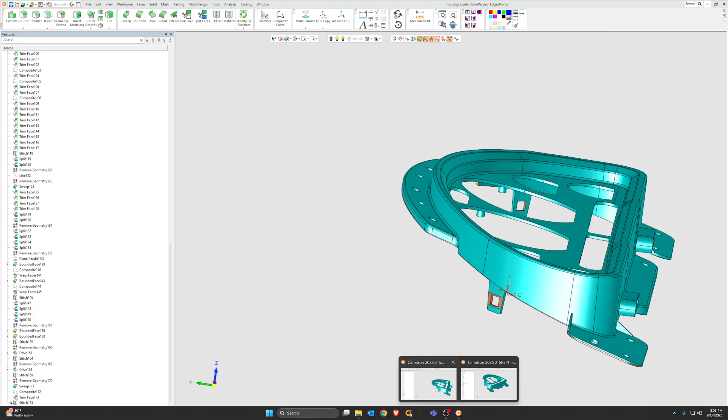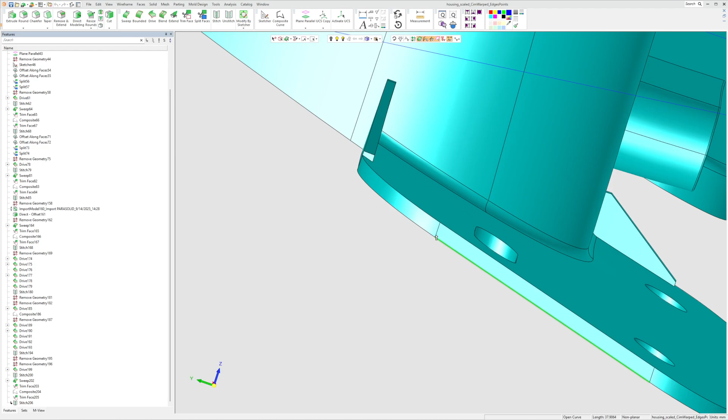Picking up where we left off, we had finished correcting our extra pull directions, and I was talking about how these NURBS faces will create wonky parting lines. What you can do to avoid that is cheat it a little bit. You can just move the parting line up a little bit, and we're talking 0.05 millimeters. So what do I mean by that?

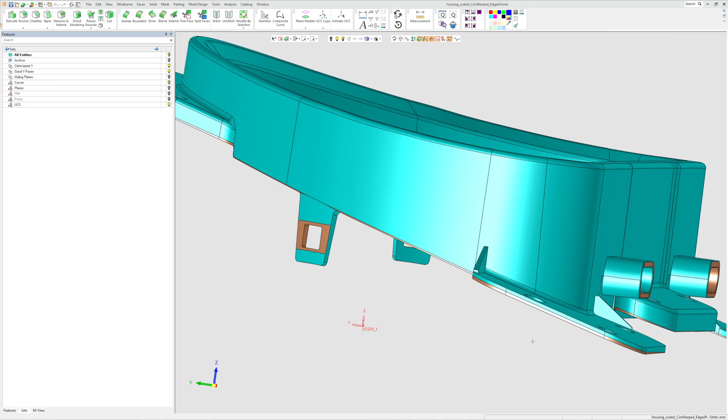Let me turn on all of these, as you can see here. This is quite large just because of the way this part is angled, but also just to demonstrate what I'm doing here. I've essentially moved the entire parting line up. If this is a real world part, I would try to get that gap to be as small as possible while maintaining a straight line.

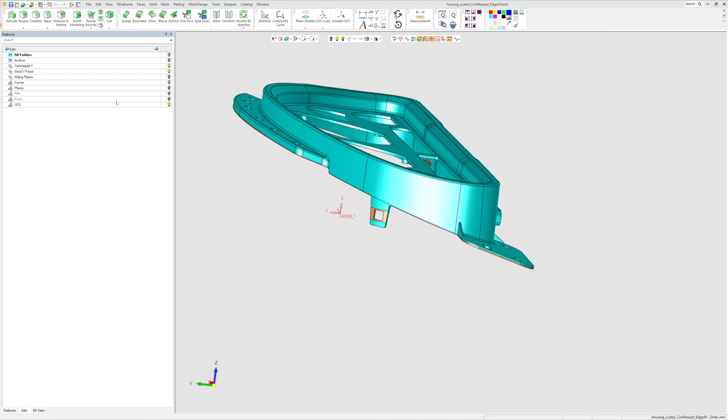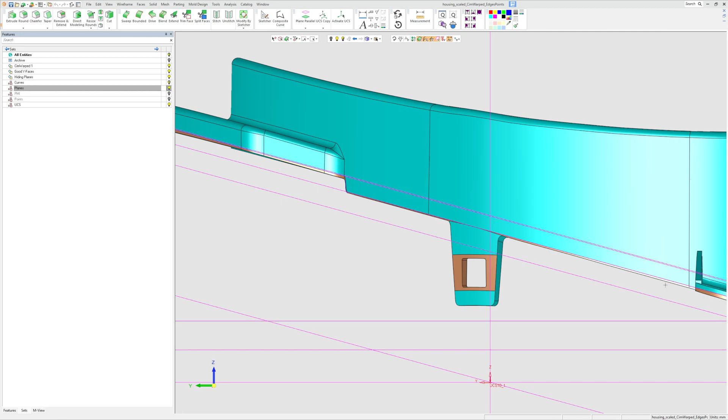So that's kind of what we got to do to make this happen. We create parallel planes, planes on an angle that will fit what we're trying to do. In this area down here, I think these were set to 15 degrees. You're going to set it to whatever grabs all of the faces and leaves this sliver as small as possible.

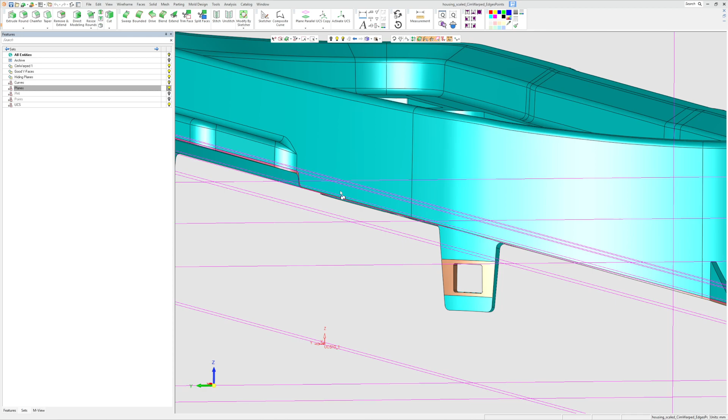And you're going to do that for all these sets of surfaces. For these surfaces up here, I had to create some extra planes. So I've got 1, 2, 3 here. And then you're just going to use the split face function, and split face all of these. Now this gives you the opportunity - see these radiuses here were going to be based off NURBS faces, and they're going to be really difficult to deal with.

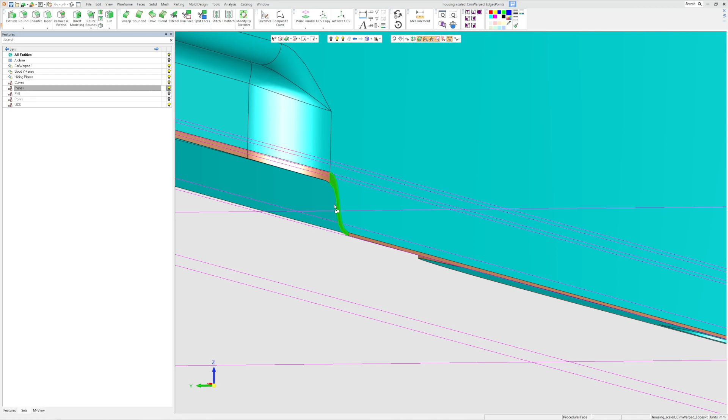In these split lines, once you split line these faces, you can connect these ones to this bottom face here, and create whatever standard radiuses you want. So if your mold builder wants 1.5 degree or 3 degree, you can make that happen, and then your transitions with your parting line will look a lot cleaner. So you're going to use these planes to split face these little slivers here, and then use some extra planes and sketching to create whatever radius you want where radiuses are needed.

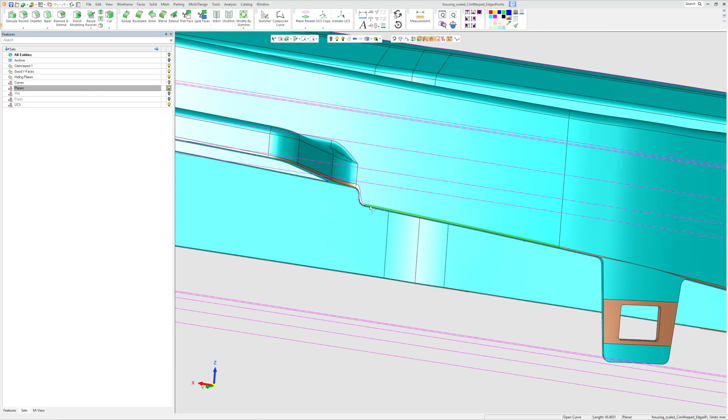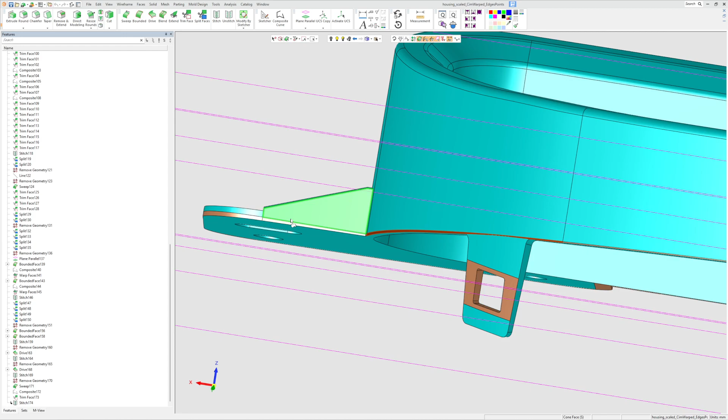And you're going to go all the way around the part, and split face it. And then you are going to take all of those faces - they would have been the same turquoise color - delete them, all of the slivers all the way around that were still turquoise, and then create a composite curve going around the entire perimeter of the part.

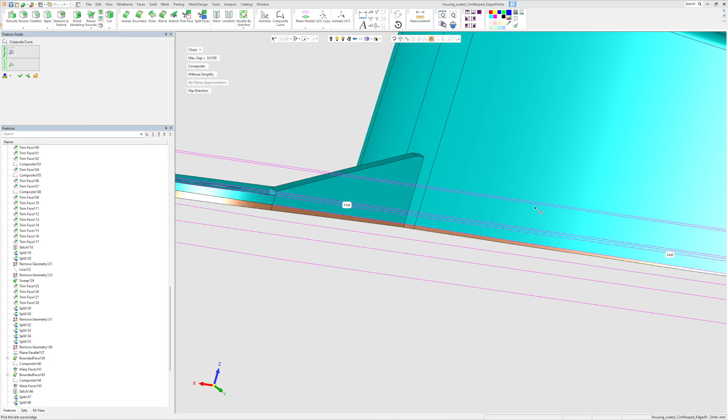Once it's all the way around, you're going to sweep it straight down and use this surface to trim it and stitch it together.

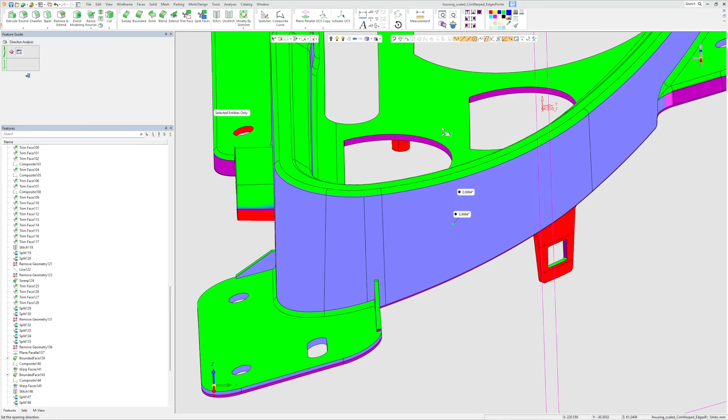And so what you'll have is all of this up here is positive draft on the top side, but this little sliver right here that nobody's ever going to see with their naked eye is zero draft, so I can pull that from the bottom.

And what that will do for you is clean up that entire parting surface. Now when I went to go do my quick split parting line, I've got both of them - I've got just the regular parting line, and I've got the cheated parting line.

As soon as she loads. Come on.

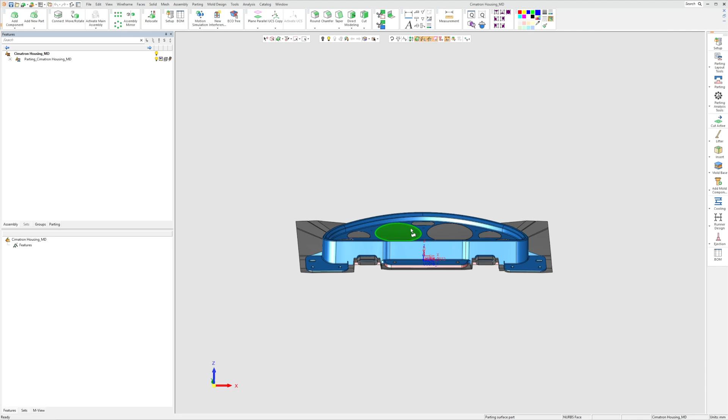Once you get into your mold build, or maybe you're doing your quick split separately, you'll see all of these separate little surfaces, all wonky looking. All this is going to have to be burned, and you're going to get a lot of griping from your mold builder, and your cost is probably going to go up.

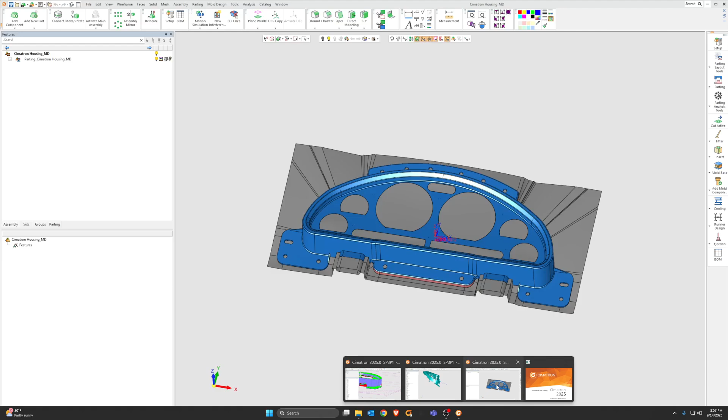So this is directly off the bottom surface. All of those NURBS faces, that's what those edges are creating, that wavy surface. So if we do the exact same thing with our cheated parting line, you'll see it's a lot cleaner, and you'll get a lot less complaints from your mold builder. And your costs will go down. So it is worth the effort, in my opinion.

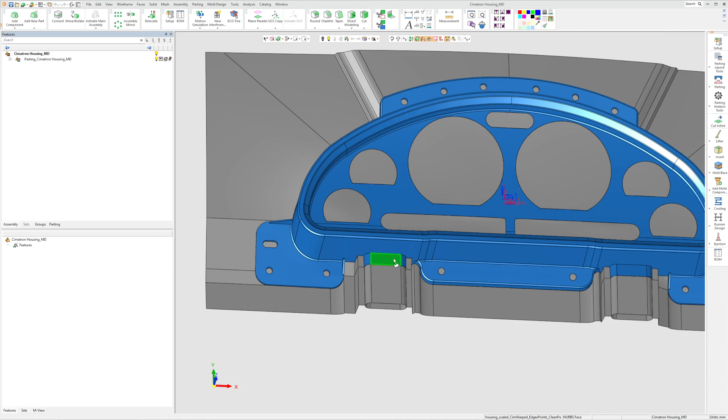Now, just from the angles on this part in just about every direction, your parting line is going to be a little strange no matter what. But as you can see, this is a lot cleaner. Especially when you get into crazy areas with these NURBS faces, you're not going to get away too easily from this. But the rest of it can be cleaned up, and not only that, it gives you the opportunity to drop the rest of the surface down beyond these points.

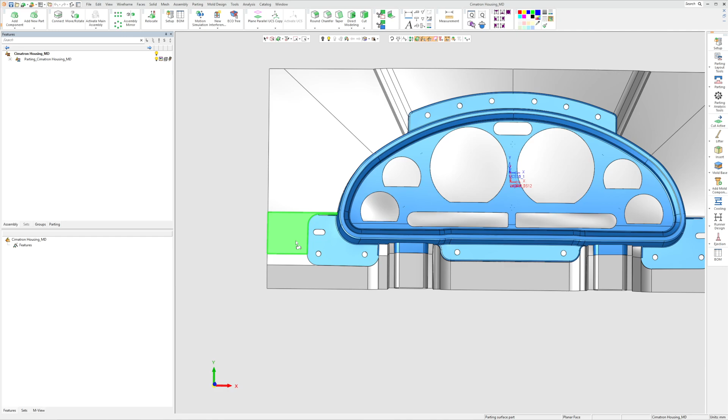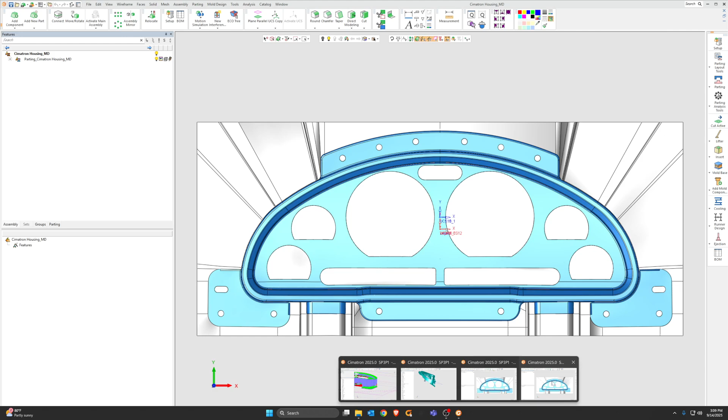Maybe I could shorten this up quite a bit, and then you can put a gap there that allows you to really increase the pressure and keep more pressure on your parting line, less flash, stuff like that. But just for comparison, this is the NURBS face straight from the edge of the parting line, and this is our cheated parting line. Just something to make your life easier down the road. Maybe cheaper too.

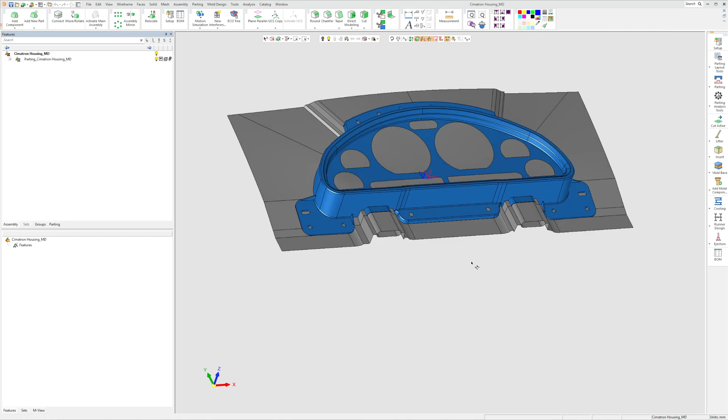And that's about it. Once you got this done, you can create your block, cut it, start creating your inserts. Now you definitely want to take your reverse warp part, run it back through Moldflow, get your actual warp exported out of Moldflow and overlay it on your original CAD just for validation. Maybe you need to tweak an area or two. But that's about the gist of it.